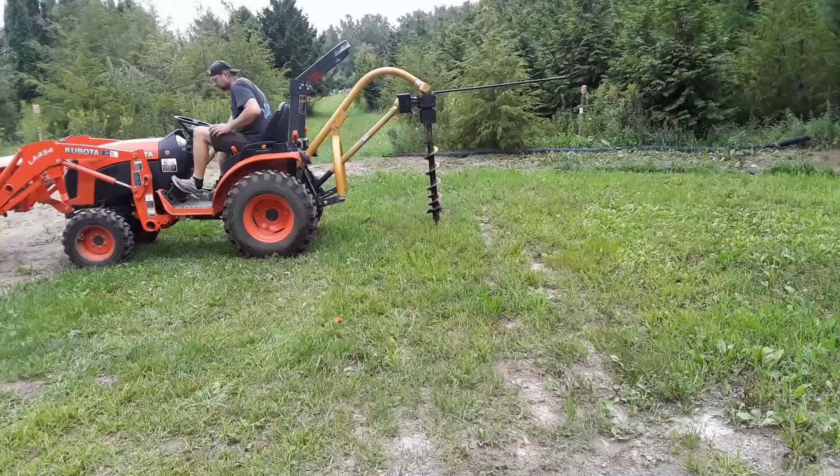So, upon delivery, everything was operational and worked the way it was supposed to. I haven't had to have any warranty work done. And I've put it through its paces — hauled everything imaginable, towed several things including a 28-foot travel trailer around the property, drilled many a hole with the auger, cleared fields with the rotary cutter, graded the driveway several times, and it's a long driveway too — almost a quarter-mile long. On several occasions I used it as a crane as well, and quite literally moved tons of dirt.

There was one instance where it was a little difficult to get started, but then again it was negative 14 degrees Fahrenheit, which is negative 25 Celsius. Despite holding the glow plugs down a lot longer than usual, it would start and chug and die, start and chug and die, and eventually did stay running. Possibly I should have had some anti-gel in the fuel. But overall, it's been very reliable — it hasn't let me down.

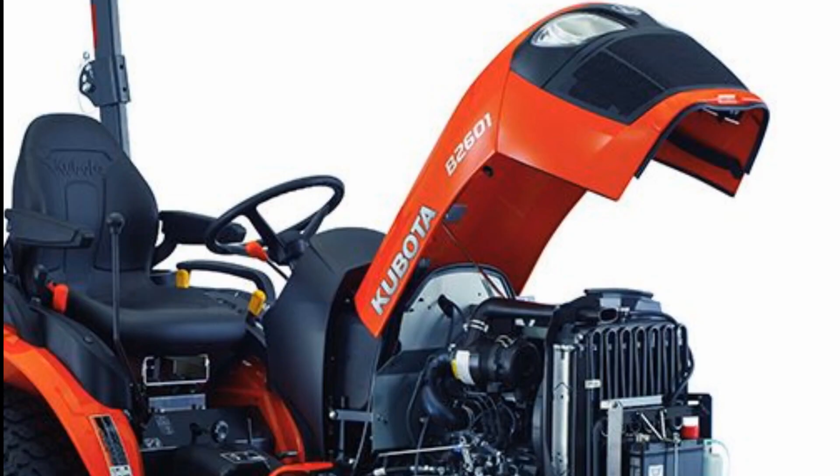Almost immediately after taking delivery of the tractor, I was hoping I didn't make a mistake and wished I had gotten the B2601, which is essentially the same tractor just with a more powerful engine by 3 horsepower. However, after 100 hours of operation, there's only one time I felt I could have used a little more power — using the rotary cutter and going through some really tall, really thick brush. Not what's showing on screen here; this stuff here is no problem at all for the tractor. But there was some other stuff that bogged the tractor down a little. I just had to slow down and it was fine.

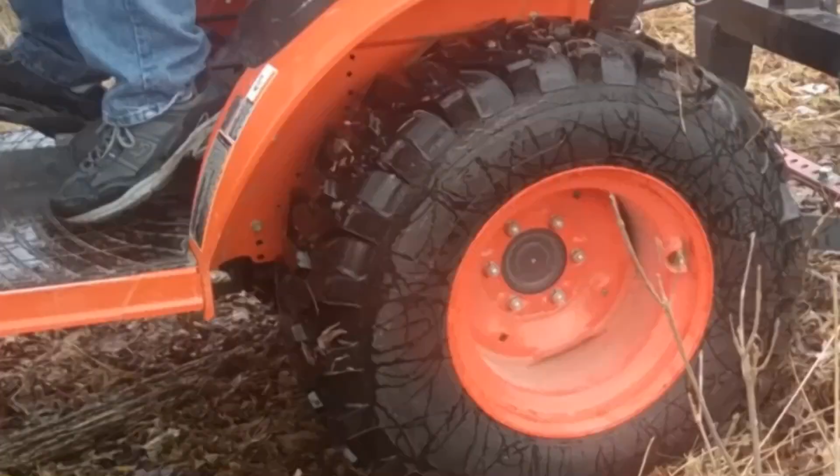But other than that, power's not my problem — I run out of traction before I run out of power. I do have ballast in the tires, which helps a lot, and I normally have the back blade on, which adds a couple hundred extra pounds. But even in four-wheel drive with the diff lock on, the engine will break the tires loose before it bogs down, and that's really only when using the front-end loader. For everything else — box grading, mowing, dragging stuff around — traction's not a problem, and power's not a problem.

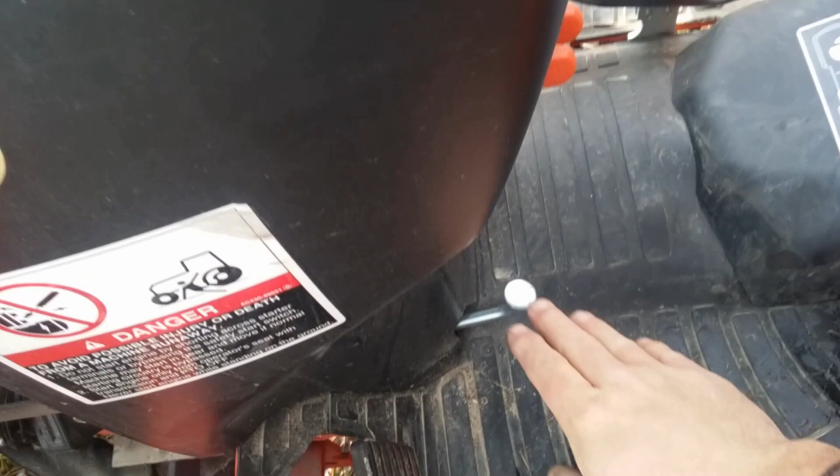Just like everybody else probably, I use the steering wheel to pull myself up onto the tractor. However, on several occasions I've accidentally stepped on the release lever when getting on, and therefore the wheel pivots backwards and I lose my balance temporarily.

So now I'm definitely more cognizant of where I put my foot when getting on.

And speaking of steering, the power steering on this is fabulous. It's absolutely effortless. All you need is just a real light touch with the palm of the hand. You can even steer it with one or two fingers in the spokes, actually.

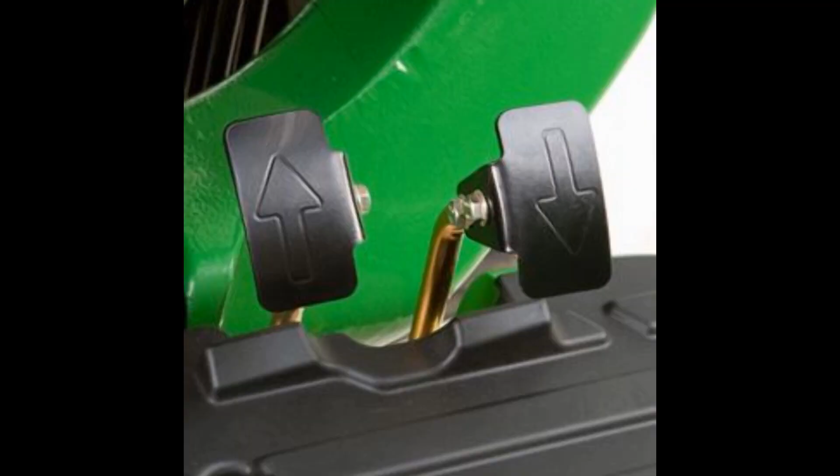Kubota uses this treadle pedal design to operate the hydrostatic transmission to go forward and backward. I've seen plenty of times in these comparison videos, the John Deere versus Kubota, that people advocate for the treadle pedal setup. They say that it's more intuitive, and the John Deere setup, which is a side-by-side pedal, not as good because you can get confused and hit the wrong pedal.

Well, that doesn't really hold too much weight with me, because even with using a treadle pedal, I've pushed the wrong pedal and gone the wrong way. When that does happen, usually it's when I'm turned around looking backwards and I just get temporarily disoriented, but not always. And if I had a choice on my Kubota between the two, I think I'd take the dual pedal setup instead of the treadle pedal setup.

This tractor has 3 gears and I use all 3 of them regularly. Whatever task I happen to be doing, one of those 3 gears seems to fit the bill well. Now, I understand some of the tractors, maybe only the subcompact tractors, have only 2 gears, and I really couldn't imagine having only 2 gears.

And I'm certain that there's those out there that have tractors with 6 gears or 12 gears that would say, I couldn't imagine having a tractor with only 3 gears. To those people I would say, touche.

You have to be careful though with the hydrostatic transmission. When you let off the pedal, it brakes automatically. So when traveling at top speed in high gear, and you let off the pedal too fast, it'll decelerate quite abruptly, and if you're not ready for it, it could actually throw you forward into the steering wheel. That part is not in the operator's manual.

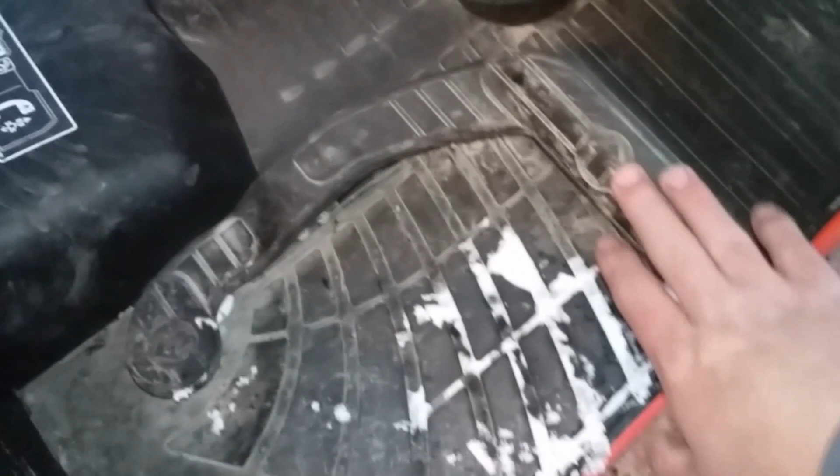Something I discovered too with this pedal is that when it's very cold, this pedal does not return to neutral as fast as it does when it's warm. It's a little sluggish. So when I use the tractor the most in the summer, I developed a very good feel for how fast the tractor would slow to a stop when I released the pedal. So then when working in the winter, it caught me off guard a couple times where it didn't slow as fast as I thought it would, and I came close to hitting a few things.

And in those instances, my thinking wasn't quick enough to just think to use the brake on the left-hand side. I'm not used to using it. I never really need to, unless I'm working on a slope or I don't want to fall into a ditch that I just dug. 99% of the time, I only use it for a parking brake.

And speaking of parking brakes, it would be nice if there was some sort of indicator that the parking brake is on. Several times I've been driving around wondering why the thing seems so sluggish, not realizing I forgot to release the brake. So I'll probably fabricate some sort of an indicator here in the near future.

And while I'm on the subject of brakes, here's a feature I don't get. The brakes can decouple so that the left and right brakes can be used independently. My understanding is that that is to allow for a tighter turning radius. But the turning radius is only as tight as the pivot of the front wheels will allow.

So in this demo, with no brake, I've got the steering wheel at full lock, and this is the tightest turning radius I can get right here. So here, using just the right brake, the wheel at full lock again, I'm getting the same turning radius. All I'm doing here is just tearing up my lawn, actually. Possibly I'm misunderstanding how this is supposed to work, or maybe it's just for use under different conditions, like not grass, like maybe it's muddy and the front tires don't get any traction. I'm not sure.

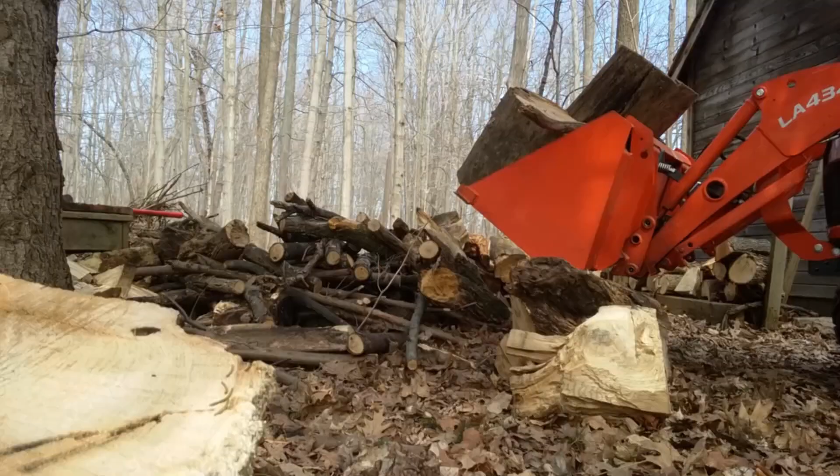What seemed to come up regularly in the comparison videos I watched was the discussion of the dual action of the front end loader, being able to lift or drop and curl or uncurl at the same time. Not that some tractors can't do it, but apparently for some it's hard to find the sweet spot with the control stick to do that. With this tractor, it's a piece of cake.

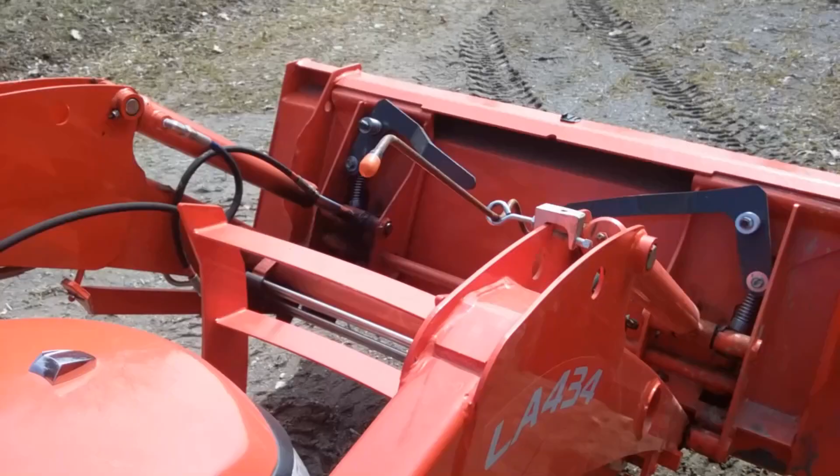The tractor doesn't come standard with a bucket level indicator, and when I bought it, I didn't even know what one was, but I quickly realized I needed one. As soon as I realized such a thing existed, I grabbed a couple ideas from some YouTube videos, threw in a couple of my old tried and true tricks, and built my own. Maybe after some more seat time I won't need it, but for now it sure comes in handy.

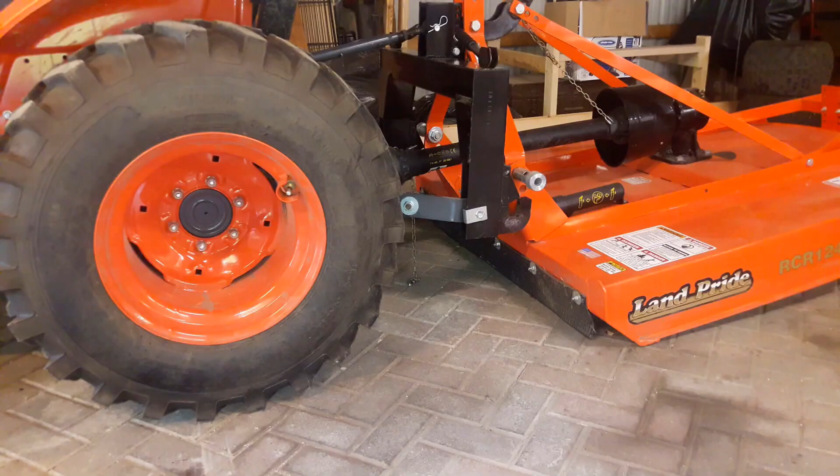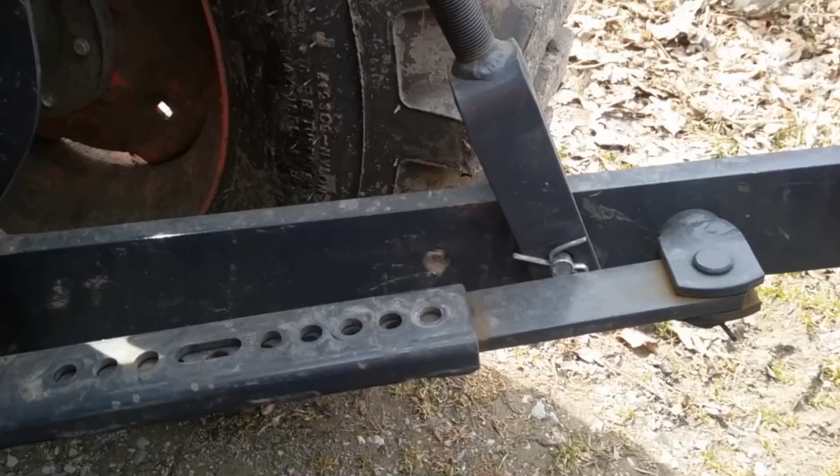I have a quick hitch and I love it, it works great, but I ended up acquiring a couple implements that aren't quick hitch compatible, so with those I gotta hook them up the hard way, which isn't that hard. They're small, I can muscle them around to get them lined up. However, the tractor came with these 2-piece pins on the stabilizer arms, and they're kind of a pain in the butt. That separate hitch pin on the bottom is hard to get out sometimes, and even more difficult to put back in. So I replaced those with wire clip pins. They're a lot easier to use.

Still talking about the 3-point, one thing I need to address is this stop knob here. You use that to limit the amount of down travel your 3-point has, and I'll set this to set the height of my rotary cutter, for example. Maybe I set it at 5, I don't know, and then after a while I'll notice it has slipped, maybe down to 4 or even 3, and I've got to reset it. I can't get my fingers in here. It's a small knob, and I really can't get in here to torque it down tight enough so it doesn't eventually start to slip.

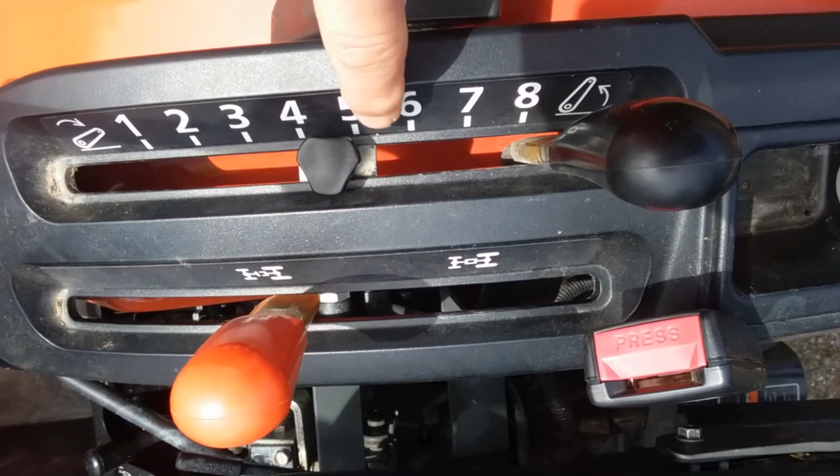So I need to roughen the surface a little bit underneath here where these rails are. It'd be nice if it was knurled or something where it would have a little more bite. Or possibly replace that knob with something like this, with a larger handle on it. This one won't work, it's too big on this end, but something where I could get more torque on it, so I could tighten it down a little better.

Overall, I'm impressed with how much this 3-point can lift, and being a first-time tractor owner, I didn't really know what to expect. But the rated capacity is right around 1,500 pounds, so even when I lift the front of the camper with a tongue weight of 700 pounds, the tractor is just going, is that all you got? It doesn't stress it whatsoever, so I haven't even gotten close to maxing out this 3-point yet.

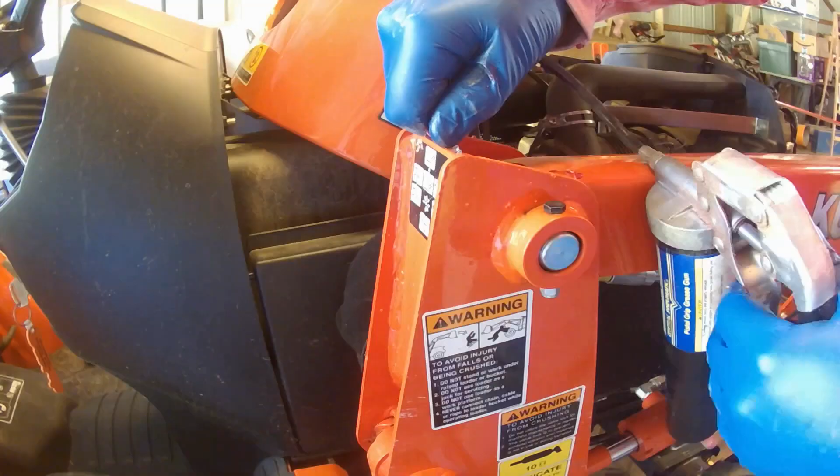I started doing my regular maintenance on my tractor practically from day one, and one thing I noticed is how easy it is. At least so far, everything I've needed to get to is quite accessible. The grease fittings, there's 3 on the main tractor, and an additional 10, I believe, if you've got a front end loader.

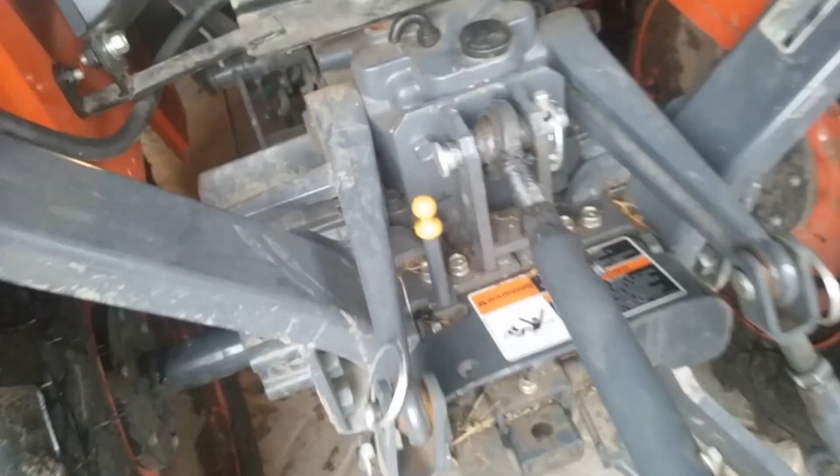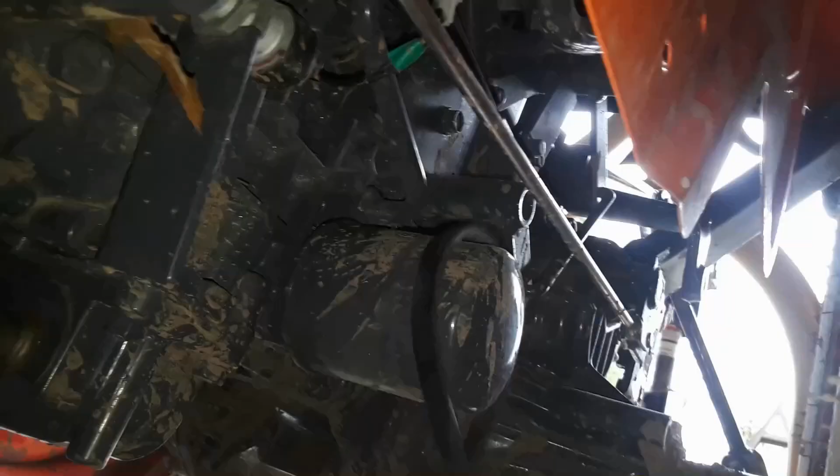Dipsticks and fill ports for both the front axle and the main hydraulic system in the rear. Drain plugs, at least for the engine oil, and filters, of which there are 6: 1 engine oil, 2 hydraulic oil, fuel, and 2 air filters.

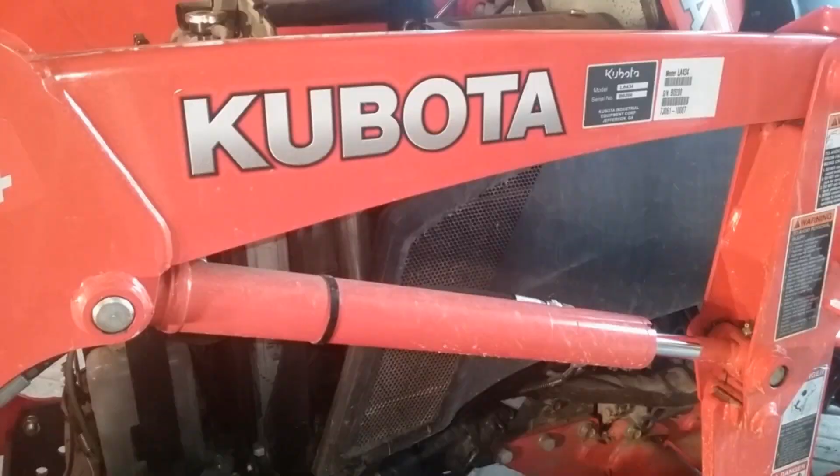I've worked on plenty of machinery where the general maintenance items were not exactly easy to get to, so this is nice. I do realize this is a tractor, not a sports car. However, that doesn't mean all tractors were designed well as far as maintenance is concerned. The side panels for the engine compartment are removable, and they just pull right out real easy, then snap right back in, and they're toolless, which is nice too.

The hood could be easier to open though. There's really no good place to grab onto it unless you reach all the way down at the very bottom to lift it up, so I'll probably end up replacing the hood ornament with like a drawer pull or a closet door knob.

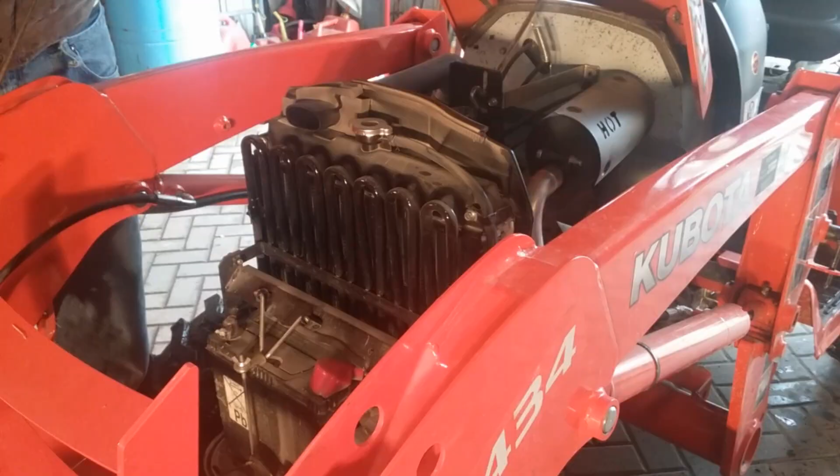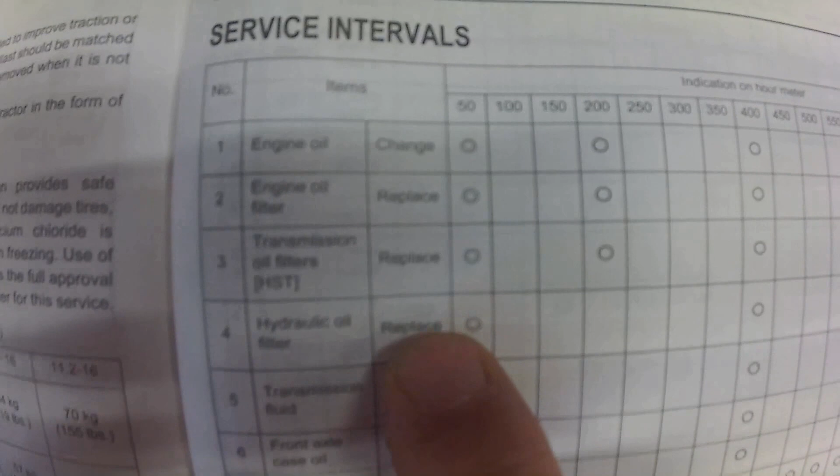Onto the operator's manual. This not only has all the instructions on how to operate the tractor, but also has the maintenance schedules in there, as well as the procedures for maintenance.

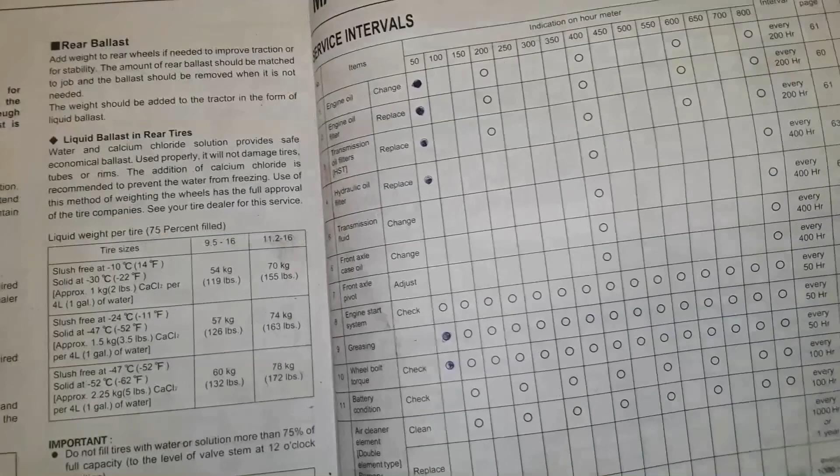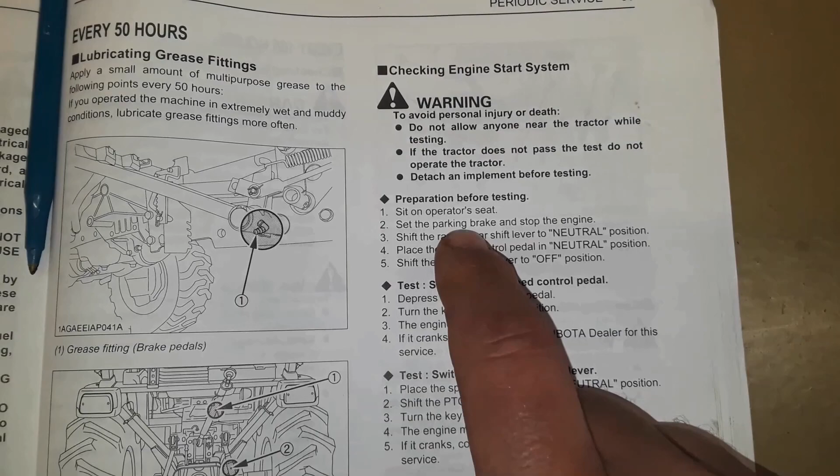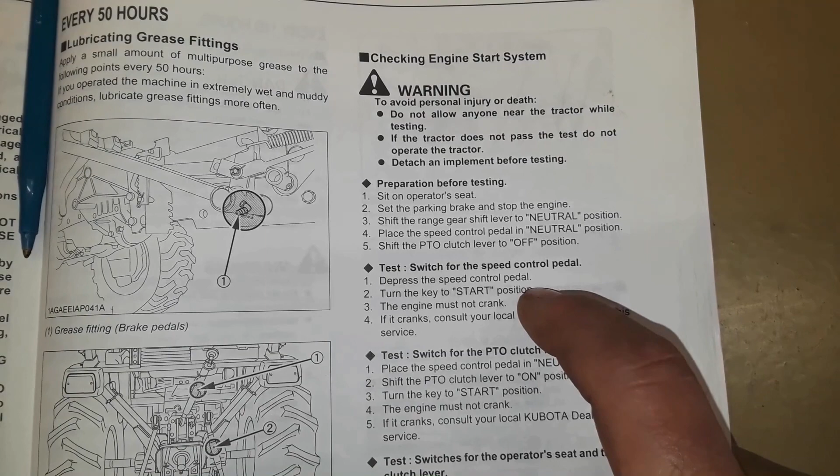I've watched plenty of videos on Kubota maintenance, and inevitably in the comments there's one or two people that state that the operator's manual is worthless and it's crap or whatever, but that's not the case. I am a technical writer by trade, I have a degree in it. I spent 10 years writing maintenance manuals for industrial machinery, and at the same time I had to reference a lot of really bad documentation on the same subject, so I know what bad documentation looks like, and this isn't it.

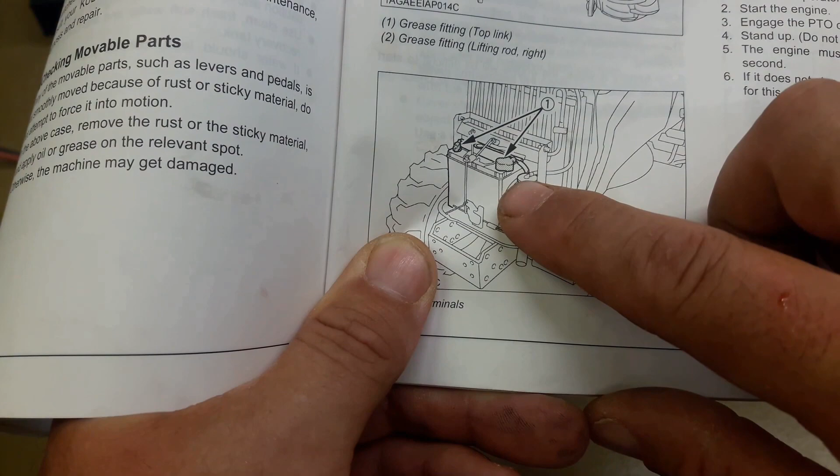That's not to say it's perfect. There is an area here and there that could use more clarification, or something laid out differently than I would have done, but in my professional opinion, I think it's actually well done.

My advice to anybody that does their own maintenance on their tractor, especially for a first-time tractor owner, would be to read through the manual first, and then after that, the internet's your best friend. For any task you need to do, there's probably a video for it or multiple videos, and those can help with tips on saving time or money, alternate tools to use, and most importantly, probably help you avoid making a mistake.

It would be nice, though, if they included part numbers in the operator's manual, so I can double check parts if I get them from the dealer to be sure they gave me the right one, or sometimes I'm ordering online and it really helps to have a part number there too.

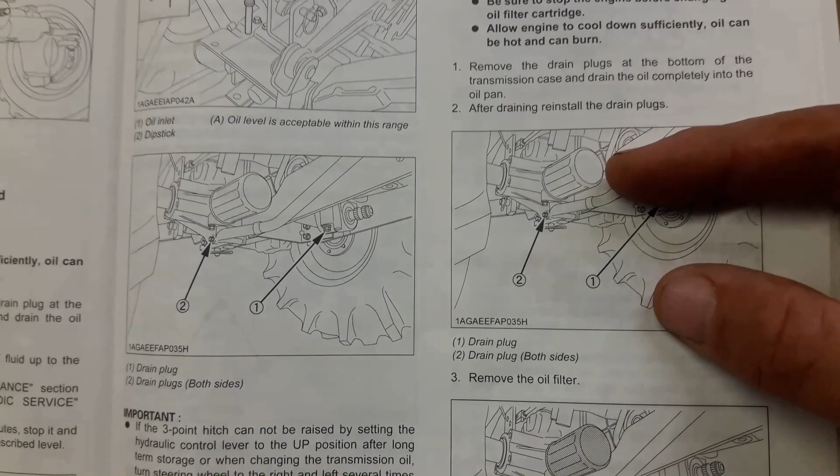I performed the 50-hour service, and all of the steps in the manual were easy to follow, but there was one procedure that was slightly ambiguous, so I ended up having a slight issue. Had I watched a video on the 50-hour service prior to that, I probably would have been able to avoid that particular pitfall. So again, the internet is a really good secondary resource.

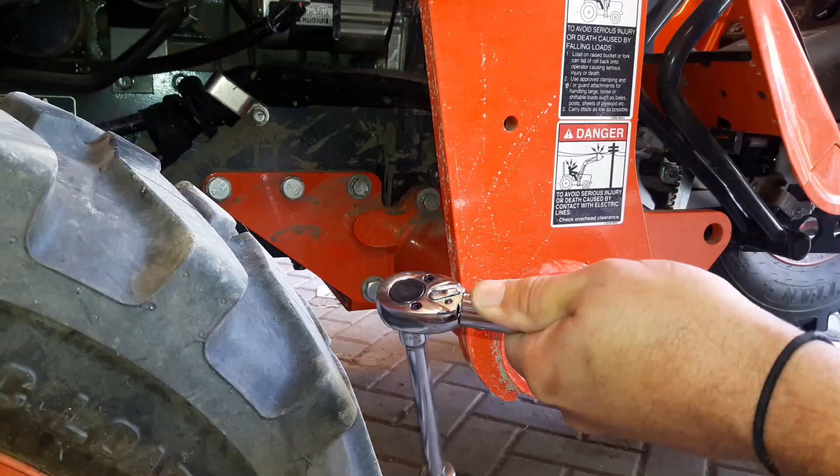And of course, now that I'm at 100 hours, I do need to perform the 100-hour service. I've read through all the procedures on that. Everything looks straightforward, so I'm confident that's going to go well.

There's some features that are nice to see. The cubby that I use to carry my cell phone, although I probably should carry it on my person instead. That way, if I were to fall off the tractor, I wouldn't have to crawl back to it to call for help.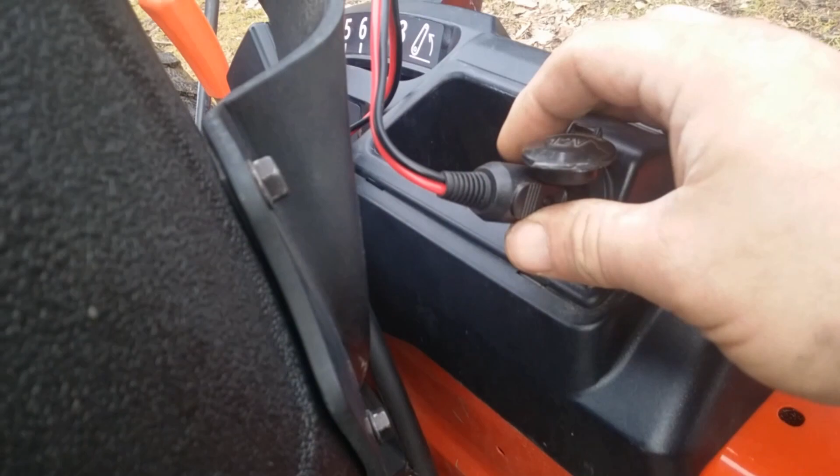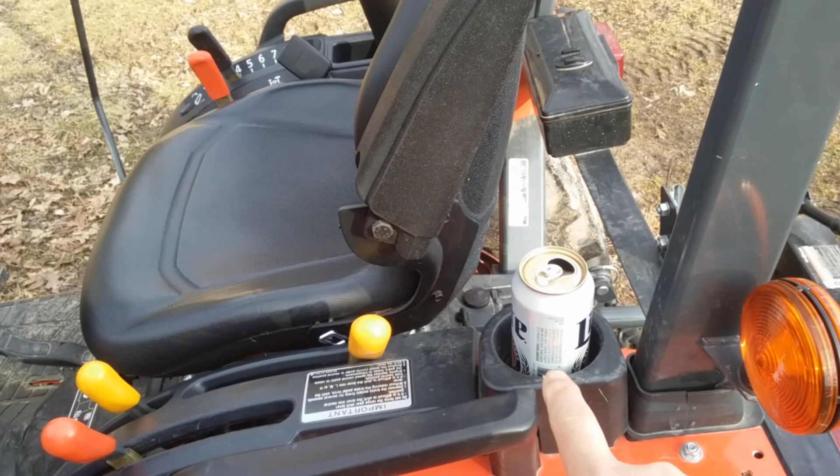The 12-volt auxiliary port is nice for charging, and also I have a handheld spotlight that would plug in here as well if needed. Having a cup holder is nice, but it's not exactly within easy reach. Then again, it is a tractor built for business, so placement of controls is primary, placement of beverages is secondary.

The stock headlights probably work fine if you're mowing your lawn at night and don't have a bucket on the front of your tractor. But other than that, working at night, you need more light, so I added an LED light bar. What's really nice is in the back under the fender are connections for an auxiliary work light, so I was able to plug my LED light bar directly into those connections instead of having to run wires all the way up to the dashboard or splice into the taillight wires or something like that.

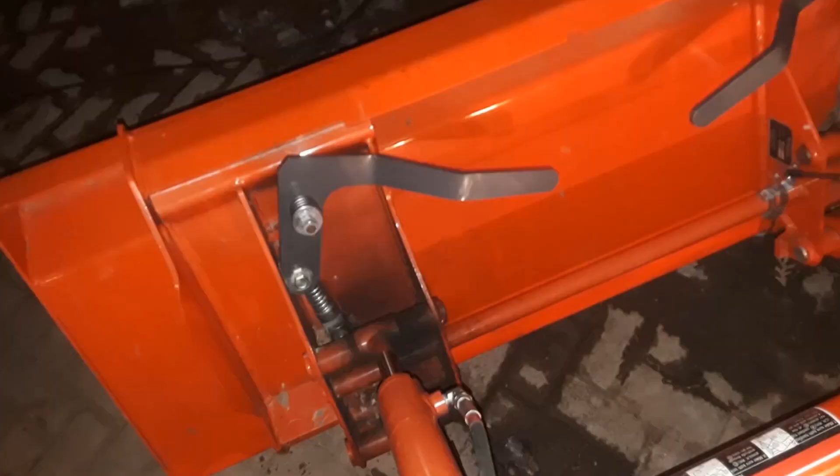Throughout this video I mentioned a few things I would make modifications to, and here's one more. The exhaust exits forward, so I end up getting a bunch of soot buildup on the bucket. This is how it normally looks, but this is how I'd rather it look. Pressure washer gets it off fine, but I think I'm going to add some sort of deflector to redirect the exhaust so I don't have that issue anymore. And like every other issue I have with the tractor, it's a small thing, not a deal breaker.

I owned this tractor for about a year and a half before even reaching my first 50 hours. I remember that distinctly because I performed the 50-hour service, and that was quite interesting. But within 6 months after that, I had put on another 50 hours, simply because I was discovering more things I could use it for or more things it could do. So it's becoming increasingly valuable to me. There's a few small things I would change, but they're minor. I'd say this is the best money I ever spent. I absolutely love it.